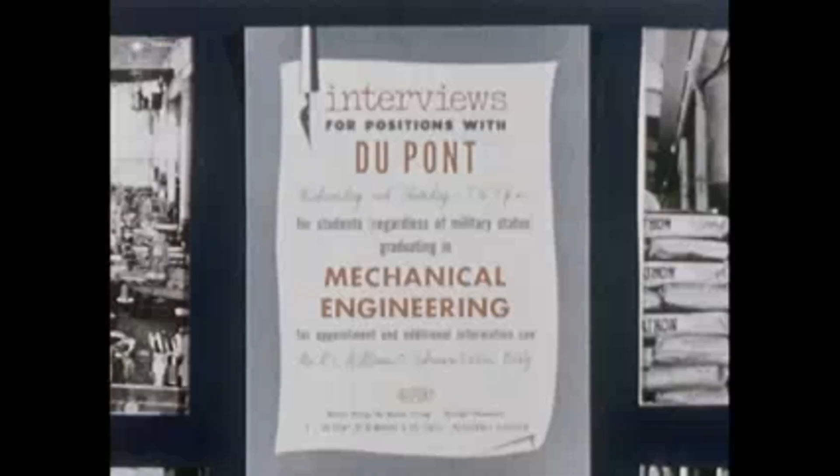This motion picture has been made to help you men who have chosen mechanical engineering as your profession. Perhaps you've considered the idea of working for a chemical company. Perhaps, like some mechanical engineers, you have wondered what a chemical company wants with men of your training. Perhaps you wondered whether you'd be working for chemical engineers, or maybe you can't see how a mechanical engineer would get very far in a chemical company.

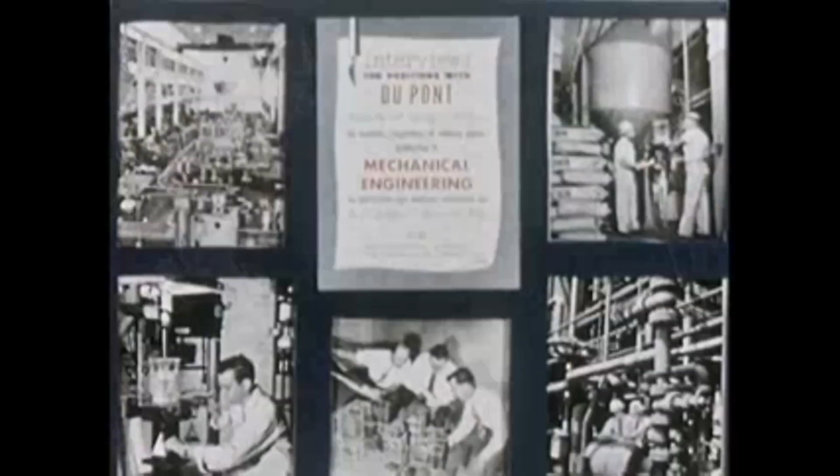That's why we want to show you something of what goes on at DuPont, where your advancement depends more on your interests and ability than on your field of training.

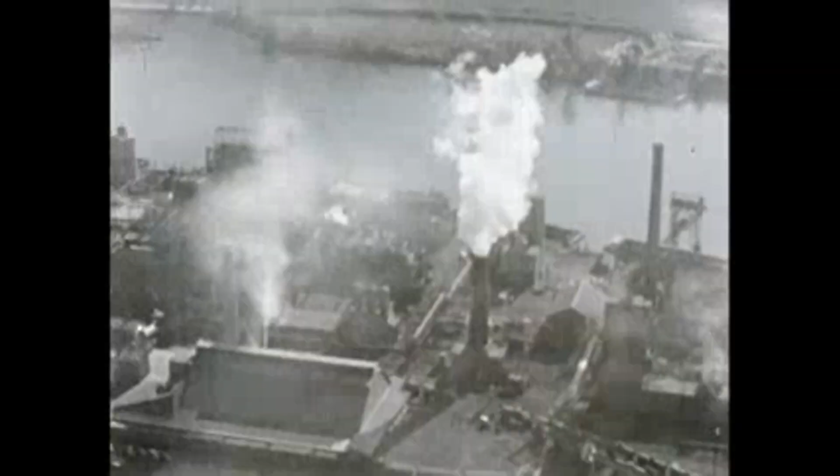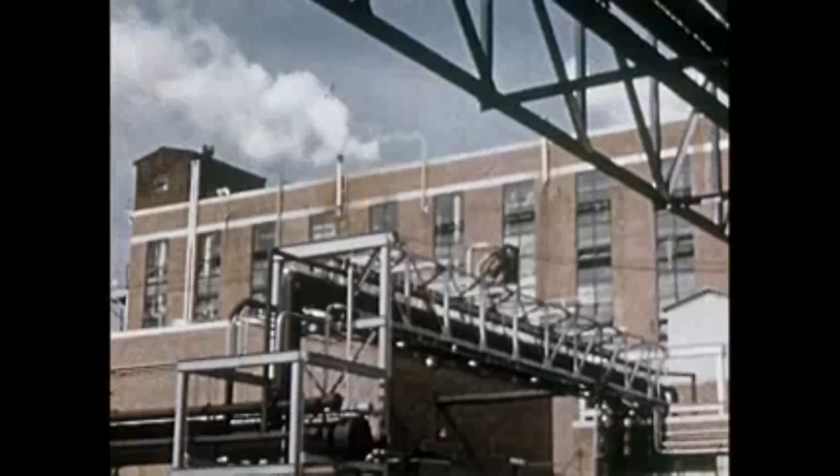Keep in mind throughout this visit to DuPont that the chemical industry is a growing one, growing by leaps and bounds. Just to give you an idea, at DuPont, in the first 5 years after World War II, over $700 million were invested in the manufacturing side of the business.

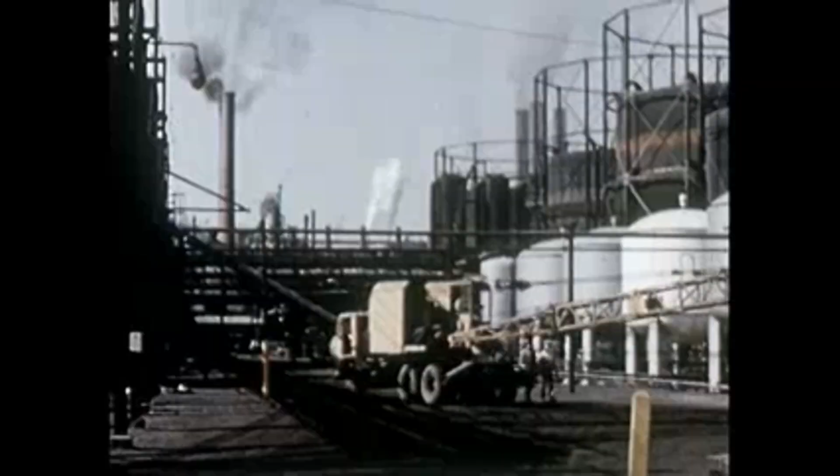There are now more than 70 plants in 25 states. No one actually can tell where the end is, but we do know that every year new and more complex products come out. New fibers, new finishes, films, dyes, plastics, agricultural products, just a few examples.

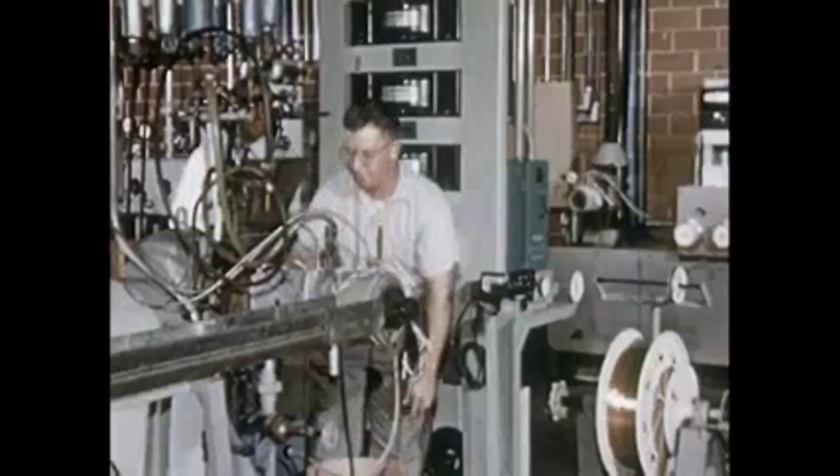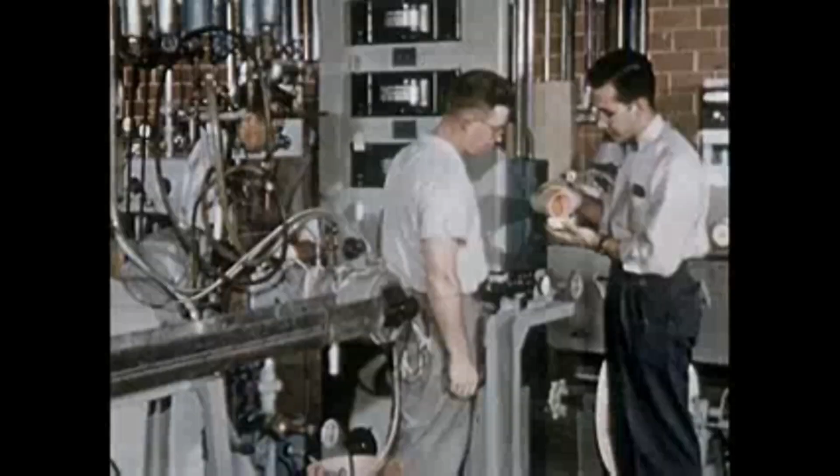Before making any one of those products commercially, a mass of mechanical problems first had to be faced, appraised, and solved. And here's something important to keep in mind: at DuPont, mechanical problems are solved by mechanical engineers.

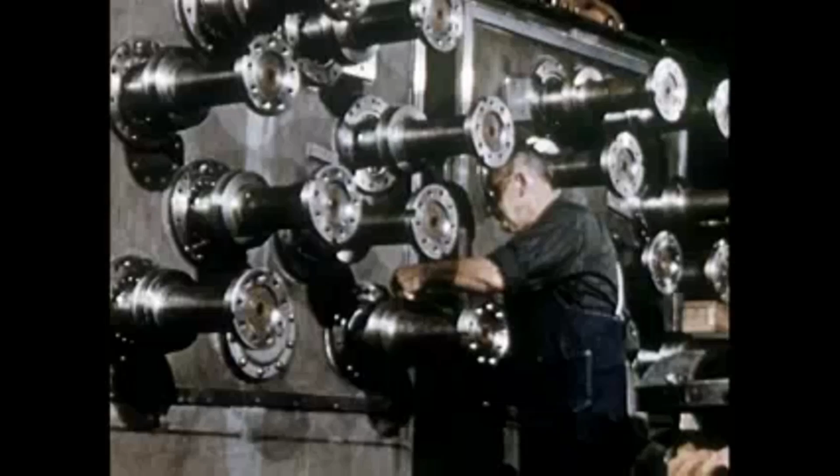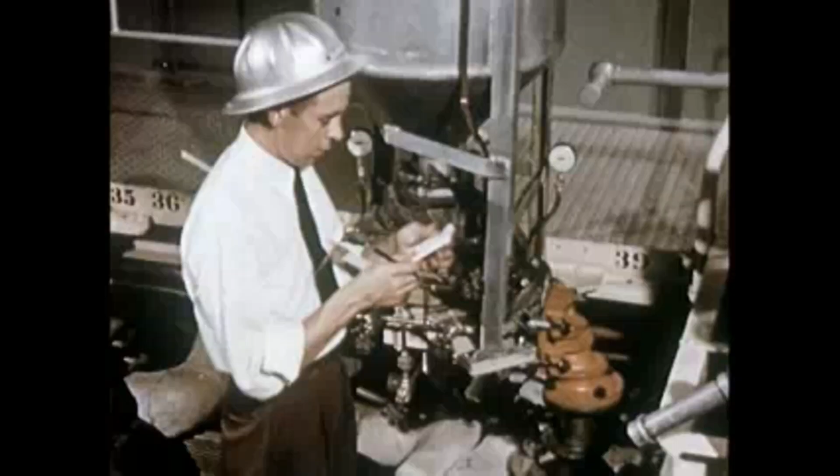The company does practically all of its own engineering work, right from the very beginnings of fundamental research. It not only develops process equipment, but actually makes a substantial part of it. DuPont men work continuously on ways to improve existing equipment. They design and build the plants, carry on the maintenance, and of course, supervise manufacturing.

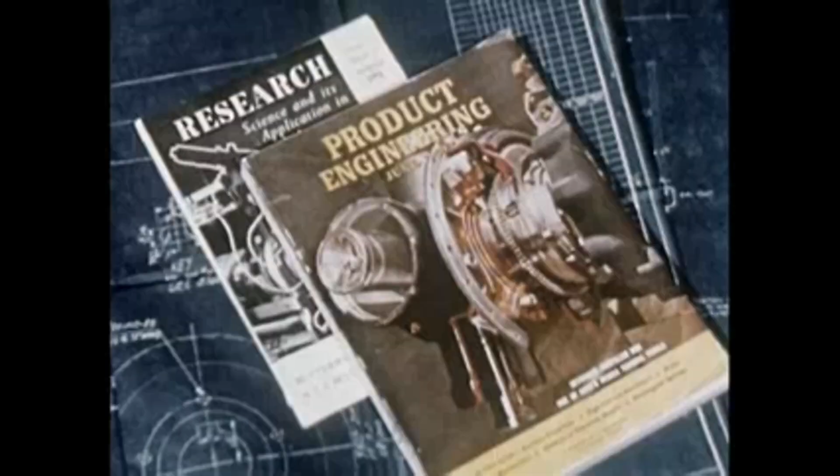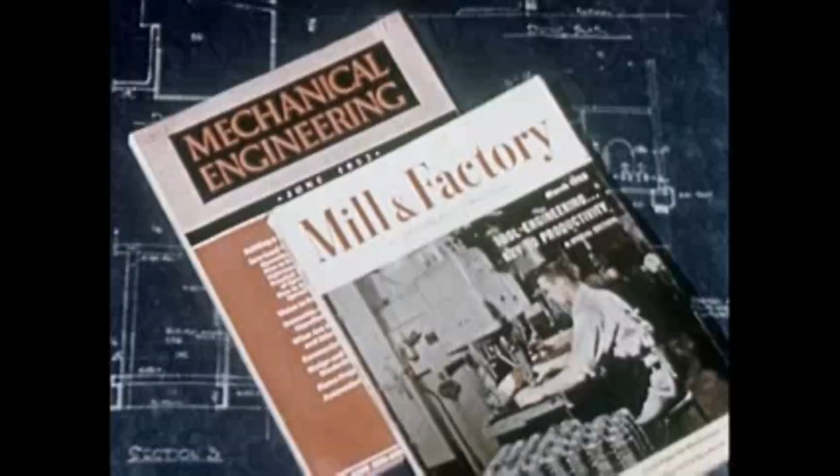Let's consider the opportunities available to you here. Is research and development your special interest? Or machine design? Maybe you're the kind of a fellow who goes more for that. How about plant engineering, including power, maintenance, design, and construction? Or production supervision? Perhaps you lean toward this kind of work with its handling of people.

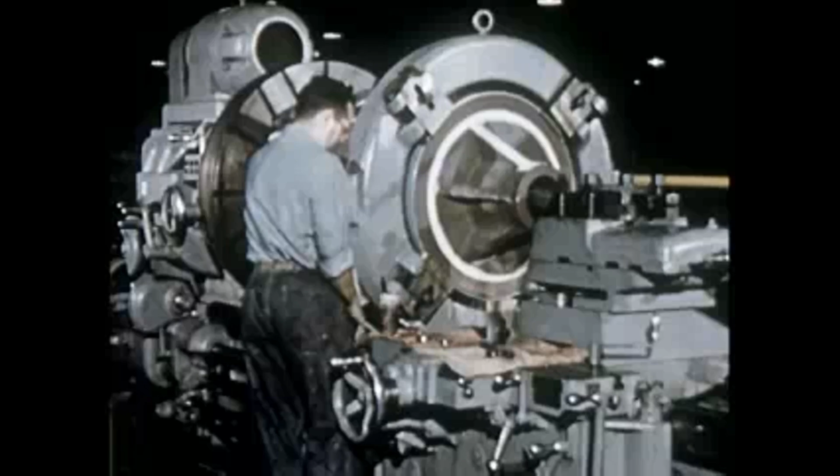Let's start with research and development. Some of the work is done here at the experimental station. A mechanical engineer in this field develops mechanisms used in making the company's products. His work may result in a massive piece of equipment like this, or in a delicate instrument like this one.

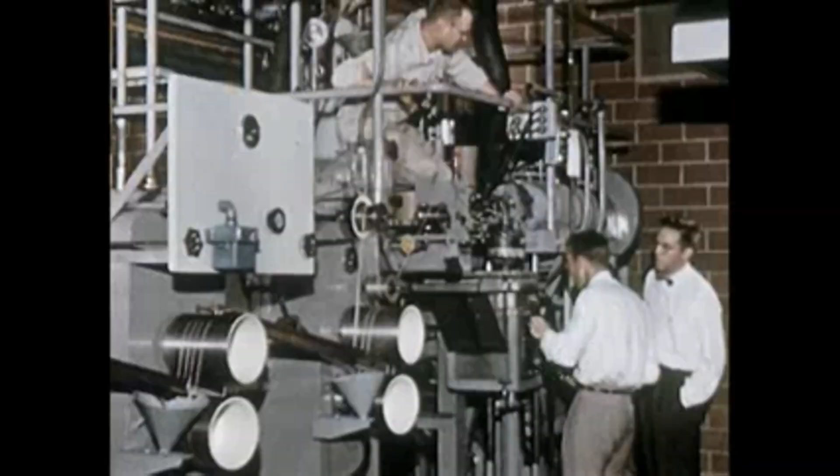There's never been a shortage of problems for research and development engineers. They run into the thousands, actually. They may lead to original equipment to meet new and specific needs, or to improvement of machines already in operation. Let's look at a few examples.

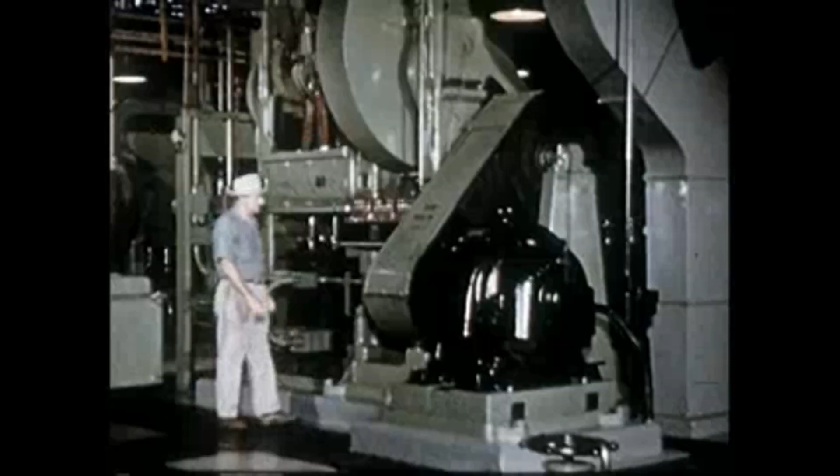These huge compressors are used in making urea from carbon dioxide and ammonia at high temperatures and pressures. Ammonia pumps like this can deliver about 100 tons a day. At these high pressures, machine work, alignment, and assembly are extremely important. Tolerances are severely narrowed as pressures climb.

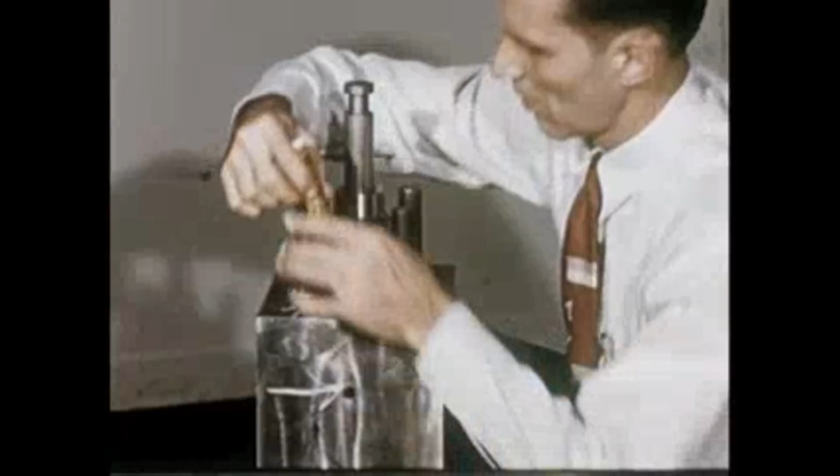One of the secrets of this type of high-pressure work is the action of the pump plunger in the packing. Specification of the right plunger material is essential. High-pressure design calls for great pains to avoid stress concentration, such as might occur in sharp transitions at corners. Pulsations at high pressures cause rapid fatigue of materials and give rise to many design problems that fall strictly in the mechanical engineer's lap.

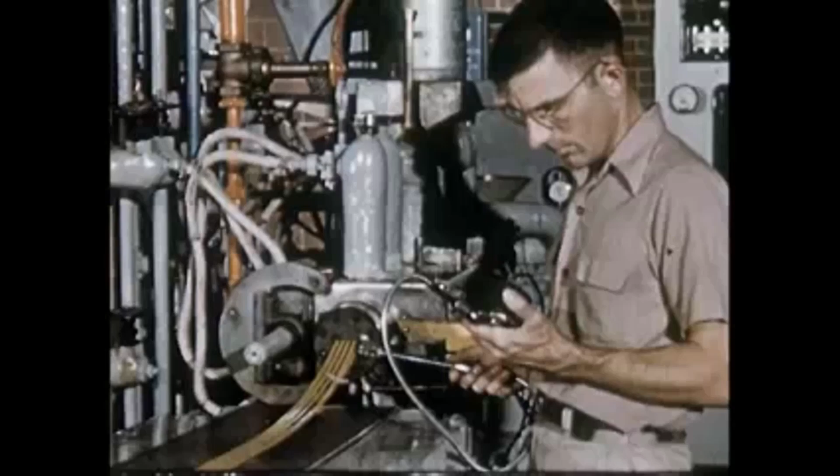Now here's a machine used in the plastics industry. It's called an extractor extruder. It melts plastic, takes the solvent from it, and extrudes it in one operation. To adapt it to DuPont plastics, or to scale it up or down, called for studies in power requirements, heat transfer, and fluid flow.

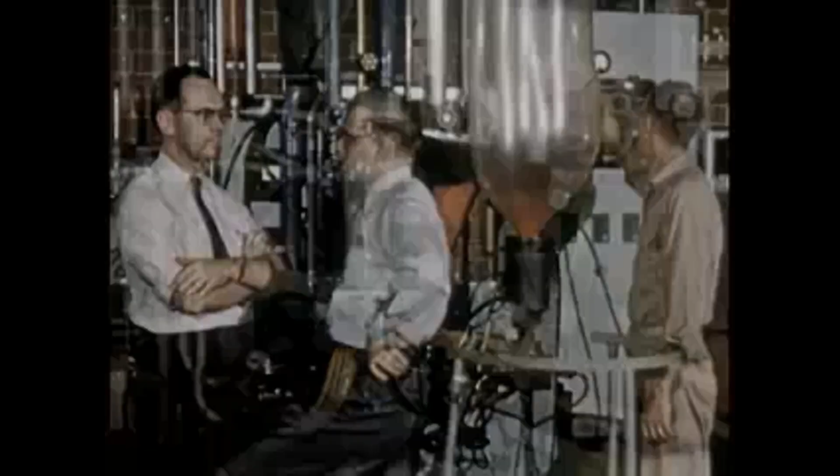In other cases, engineers often design and develop equipment for use by DuPont customers. Here are two young engineers working to improve a machine that simultaneously forms and expands a tube of plastic material. Or a fellow may get into a project that requires work at super pressures.

Here's a field that's really challenging, and young too. Behind a steel and concrete barricade, equipment can be tested at pressures far beyond those used in manufacturing today.

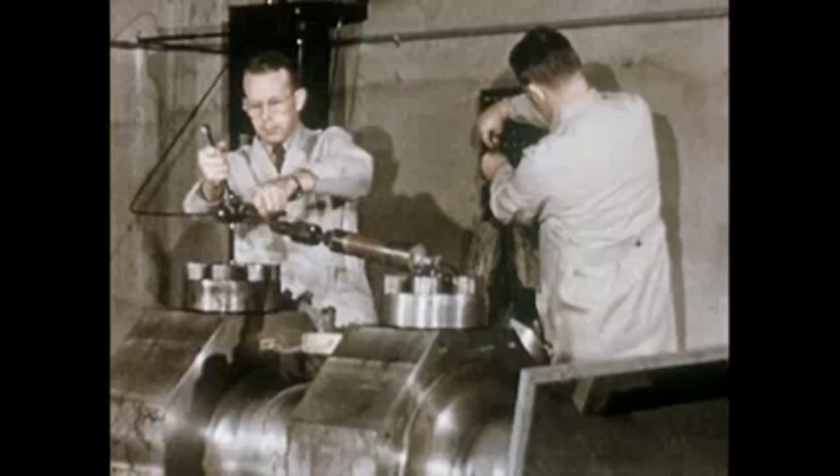After strain gauges have been attached to the test piece and the pressure lines connected, a mirror is placed so that an engineer can observe the results of the test through a periscope on the other side of the barricade.

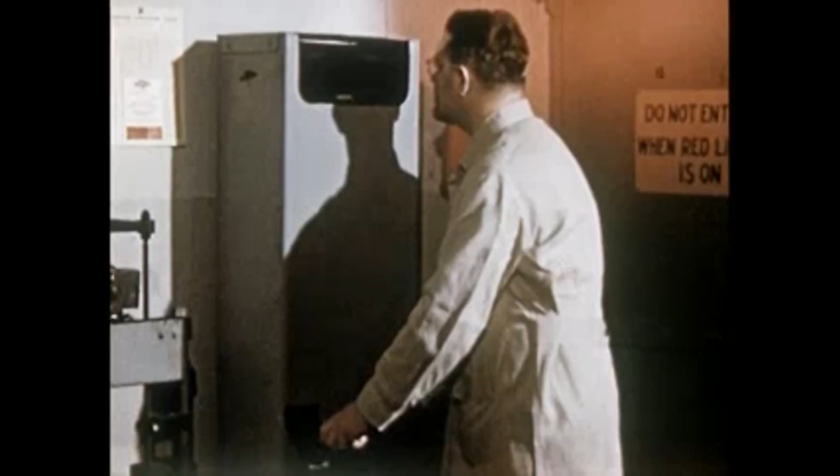There will come a time when pressures far beyond those of today will be used - 20, 30, 40,000 pounds per square inch. These men are getting ready for the time when pressures even higher than this may become part of industrial practice.

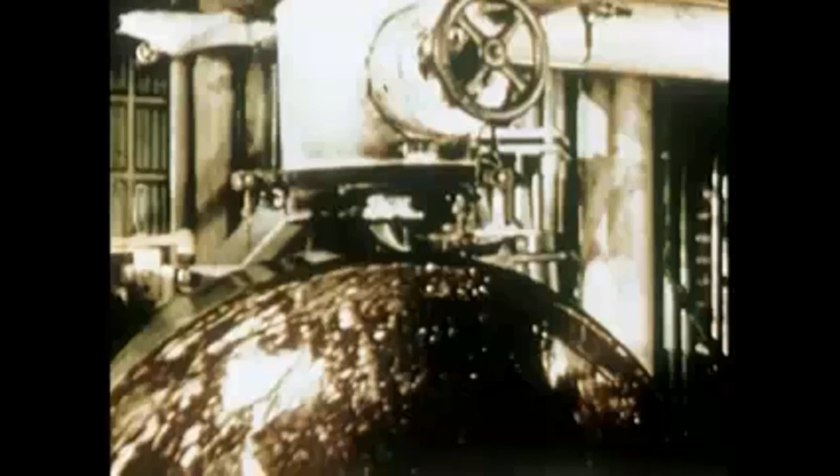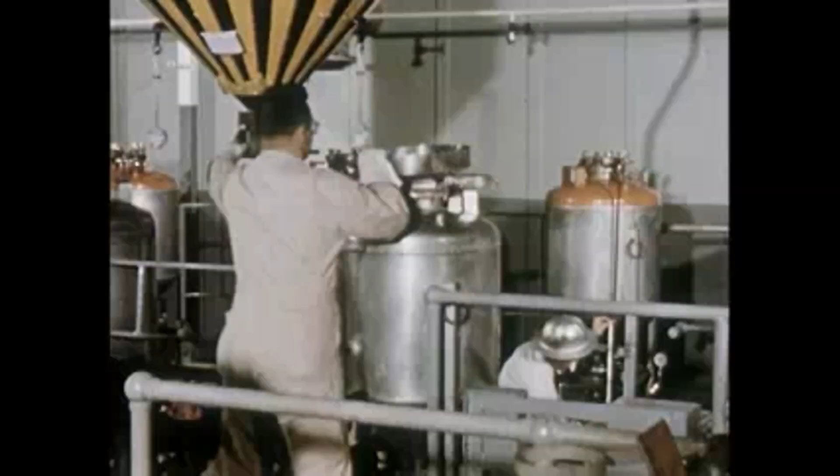When a process or product worked up by chemists moves out of the lab, teams of mechanical and chemical engineers take over. For example, here you see molten nylon being solidified on a semi-works casting wheel at an early stage in the development. Many mechanical problems had to be solved before nylon was produced successfully, and naturally, mechanical engineers had a big part in solving them.

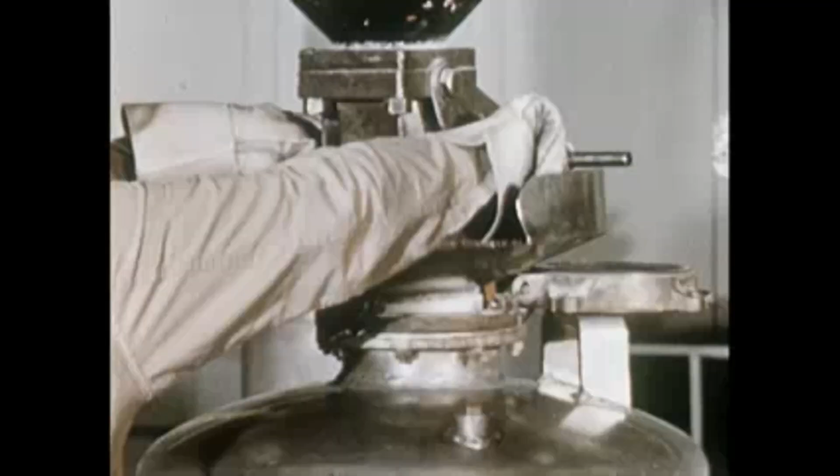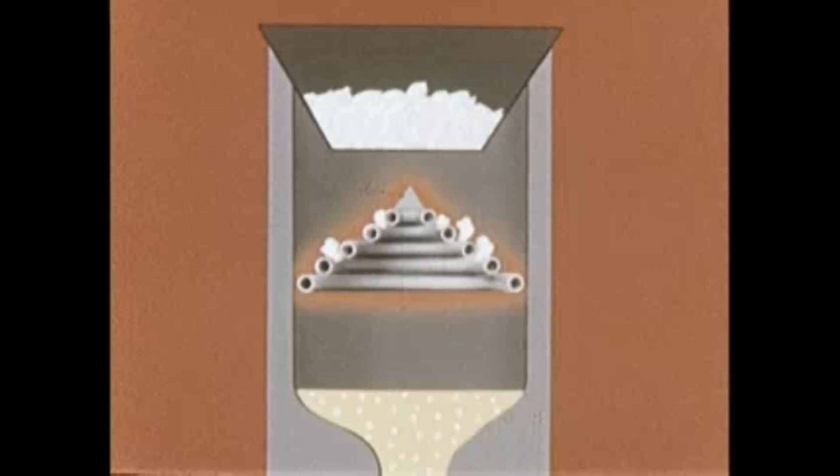Just how would you go about melting nylon chips at several hundred degrees Fahrenheit with as little decomposition as possible? Well, mechanical engineers designed and tried quite a few types of melting grids. Some of them didn't work as well as others, but they finally came up with a grid that did the job.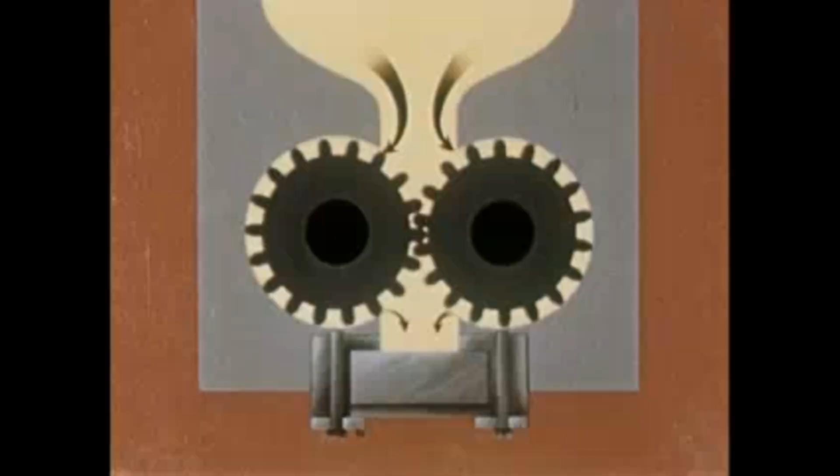Mechanical engineers designed a precision pump that works at pressures better than 1,000 pounds per square inch, but not before they licked the problems of gasketing, sealing, and materials.

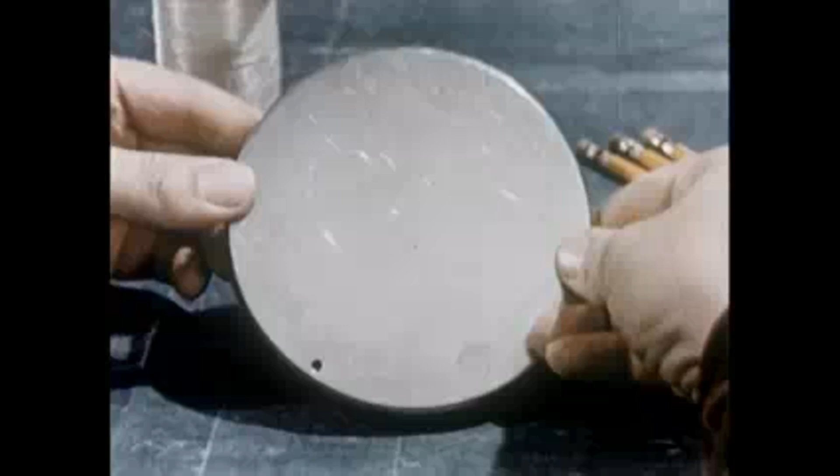The hot melted nylon solidifies into filaments as it is pumped through holes in the spinneret that are almost too tiny to see. Naturally, that spinneret isn't a standard item either. It had to be designed.

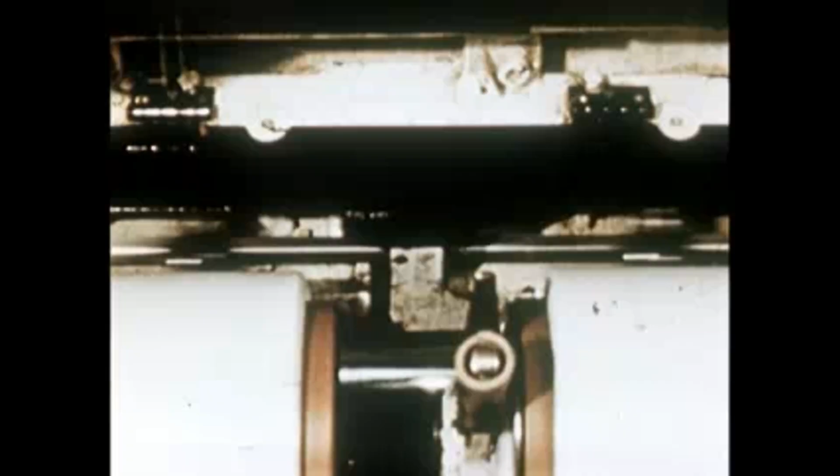Nylon fibers are sometimes wound on these spools at a rate of 1,000 yards a minute. How would you go about winding yarn at that speed without any deviation in yarn tension? Sound like an interesting problem? The fellows who developed this traversing mechanism certainly found it so.

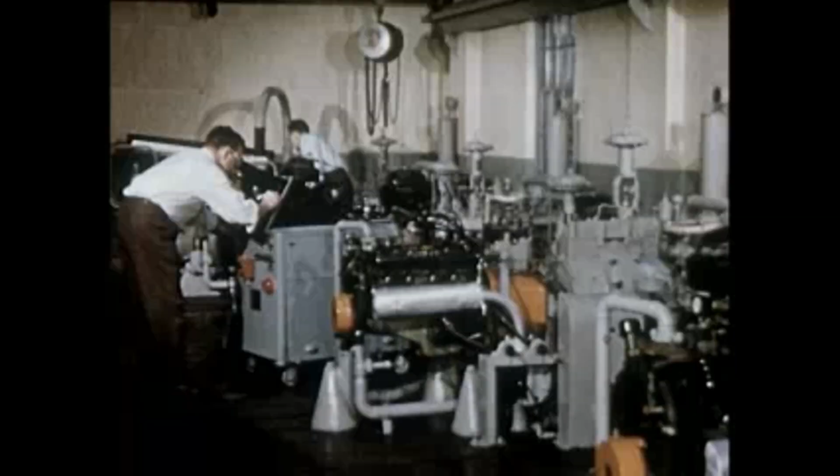Let's move on to this petroleum laboratory to see another important part of development work, activity devoted to improving existing processes and products. Here, engineers are constantly trying to improve the chemicals DuPont sells to the petroleum industry.

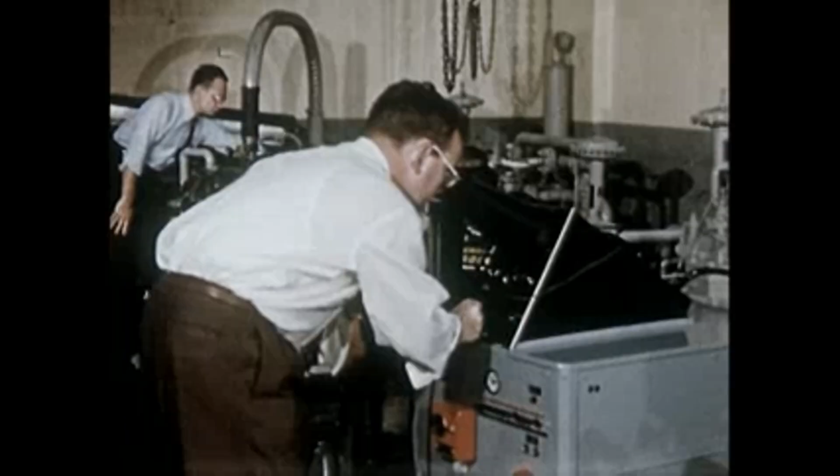Here, engineers are studying exhaust condensates that indicate the effects of tetraethyl lead. Engineers study these things in the laboratory.

They study them out on the road, too, in passenger cars, in trucks, through tests under various kinds of rigid control situations. The instruments in this test car indicate and graphically record information on such factors as horsepower, fuel consumption, speed, spark setting.

That's the way mechanical engineers, working with chemists, arrive at conclusions which result in better and better engine performances. We have seen that research and development includes developing new process equipment and improving existing processes.

It also includes design. The engineering department handles design work for most major projects. In some cases, it is machine design. In others, process equipment design. But always, it is the work of teams of engineers - mechanical, chemical, electrical, civil, and so on.

Normally, these are men who make their careers in engineering. They work with engineers from the manufacturing departments to design plant equipment and machines.

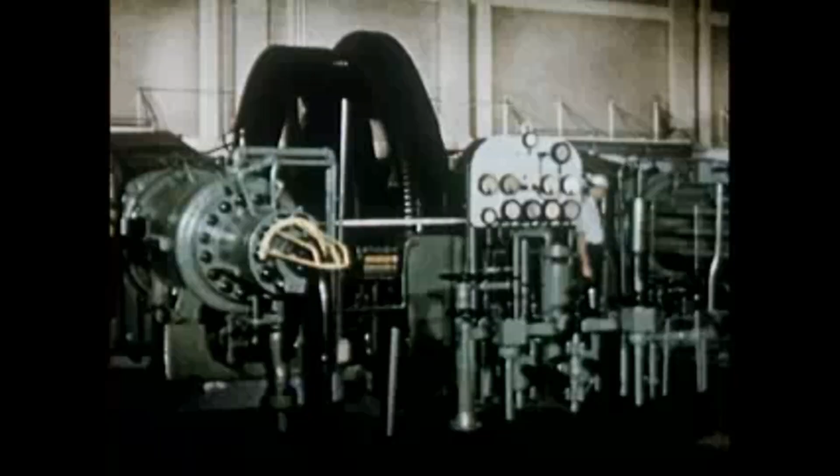For an example of major design, how about this huge hypercompressor? It builds gas pressures from 450 pounds to 12,000 pounds in 3 stages. When these compressors were built, you just couldn't buy equipment like it, so DuPont engineers pitched in and designed their own.

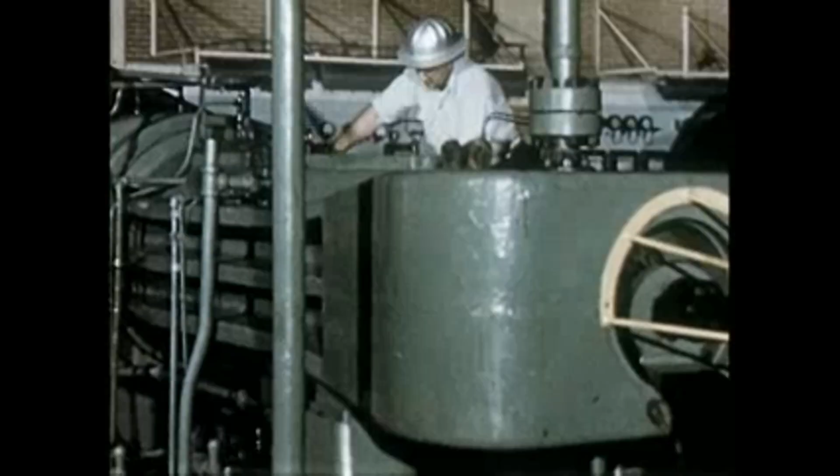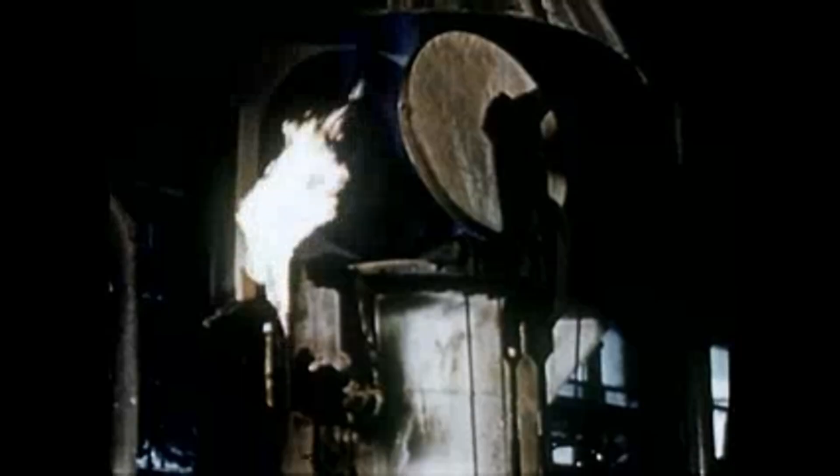Or maybe you'd like to roll up your shirt sleeves on one like this. Adapt standard equipment, such as this flue gas generator and its control mechanism, to DuPont's ever-changing needs. Over the years, more than one mechanical engineer has thought hard on this one. There she goes.

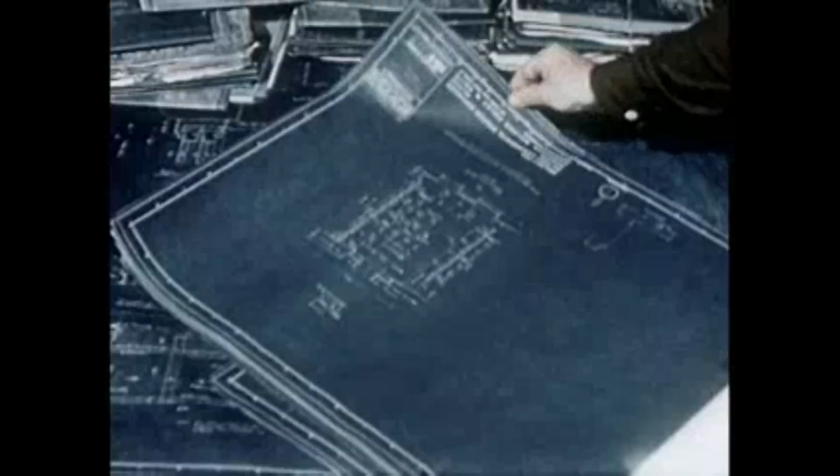These are just a few of the problems mechanical engineers work with at DuPont. They are typical of the work in research and development. Multiply them by 100 - no, better make that 1,000 - and you begin to get an idea of how important mechanical engineering is in this chemical company.

Another important phase of mechanical engineering is plant design, layout, and construction. Most companies use outside architects and contractors for this work, but DuPont does all its own.

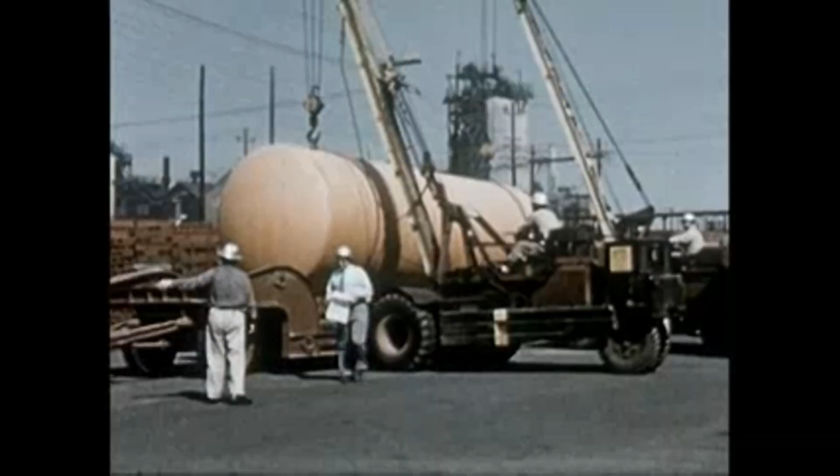Often the engineers who supervise the construction of the plants also stay on to help get them going. Of course, the design of services to go along with the buildings and machinery is included in their activities.

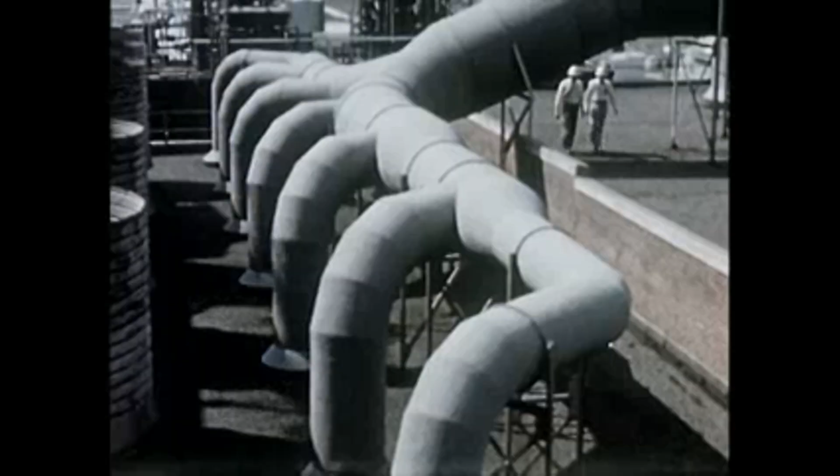For instance, this nylon manufacturing plant. These ducts are part of an air conditioning system DuPont mechanical engineers help design. During the manufacturing process, air is required at 5 separate temperatures and humidities. That's right, 5. Does that sort of problem interest you?

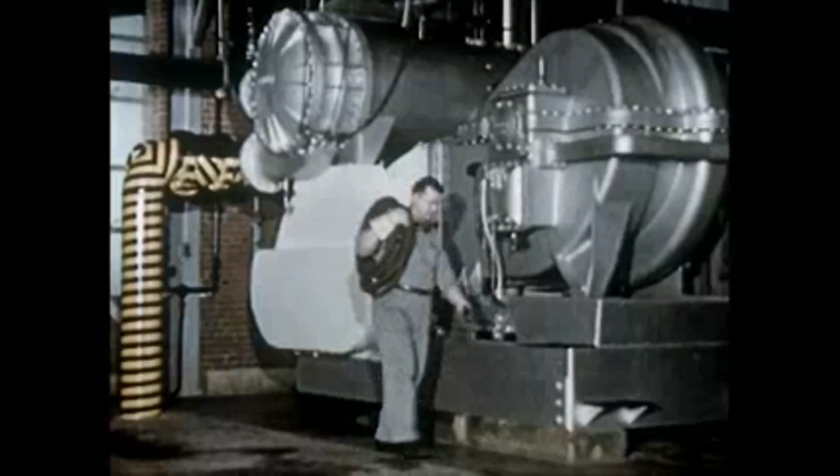As you can imagine from the size of this compressor, air conditioning is a pretty important item in many of DuPont's 70-odd plants. Or say you were tackling this problem: scrubbing carbon dioxide out of a gas mixture.

These towering scrubbers work at about 400 pounds. The pressure at the scrubbers forces the solution up the side of a mountain. Here in this tower, the pressure is released and the carbon dioxide passes off to the air. The natural fall of the water gives 200 pounds of head that doesn't have to be supplied when the water is recycled. That's both equipment and plant design in a big way.

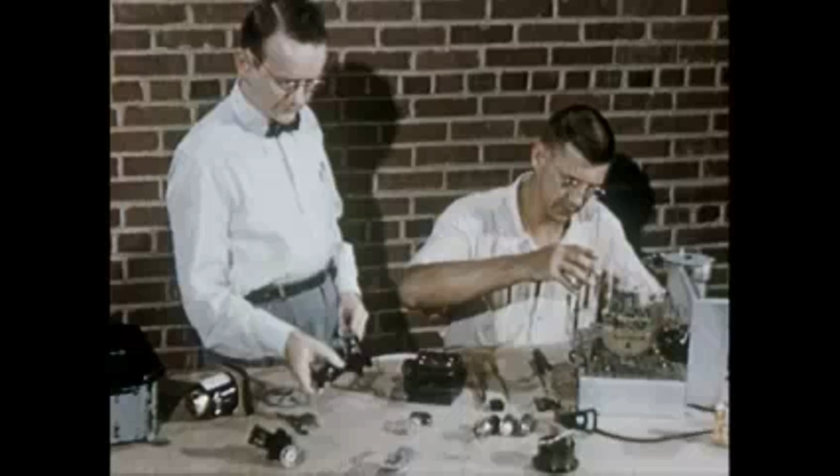Speaking of design, how about control instruments? Does that sort of work interest you? They are very important in plant design, and the advances in this field have been tremendous. In fact, control instruments today are practically a must for nearly every phase of manufacturing operation because they've come to mean so much in terms of safety and economy.

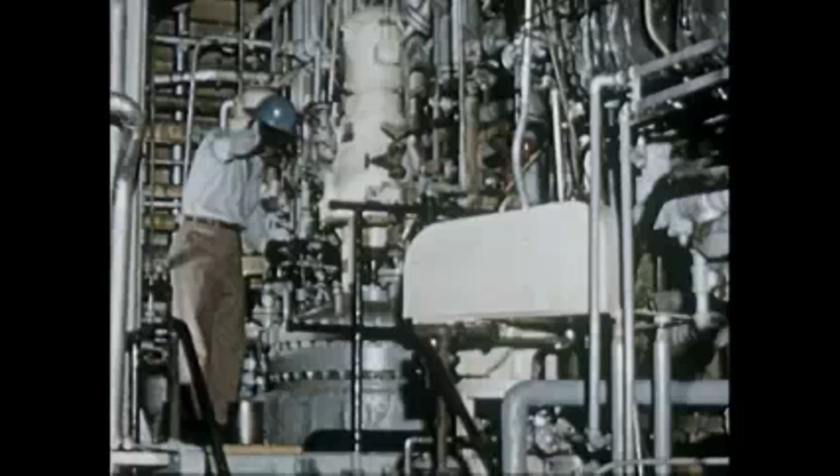Take a look at this maze of pipes, for example. To get maximum production yields, reacting chemicals must be brought together under conditions as nearly ideal as possible. All steps in the process must be smoothly coordinated.

Actually, some processes of today couldn't operate with instruments of 10 years ago. It's a fast-moving, intensely interesting field. If this kind of work appeals to you, whether you tackle it from the plant design end or from the development end, instrumentation offers tremendous opportunities.

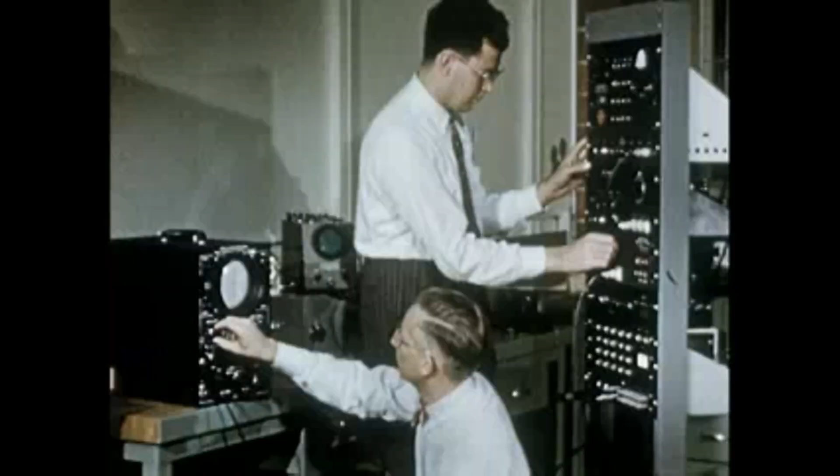Still another field for mechanical engineers at DuPont is plant engineering. This is a fairly broad field, including maintenance and power. It also includes design and construction on sub-major projects that may involve process improvement or plant expansion.

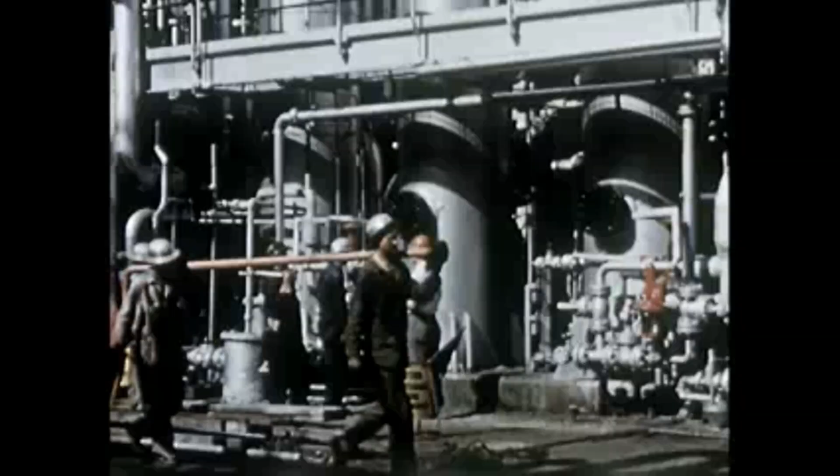Nearly all chemical manufacturing operations run on mechanical equipment: tanks, kettles, presses, pumps, valves. And this equipment gets heavy use, much of it on a 7-days-a-week basis. It's bound to wear out, and that means maintenance. Part of maintenance is keeping equipment in top mechanical shape, catching trouble before it catches you. Supervising this work calls for real ingenuity, and it involves real engineering ability.

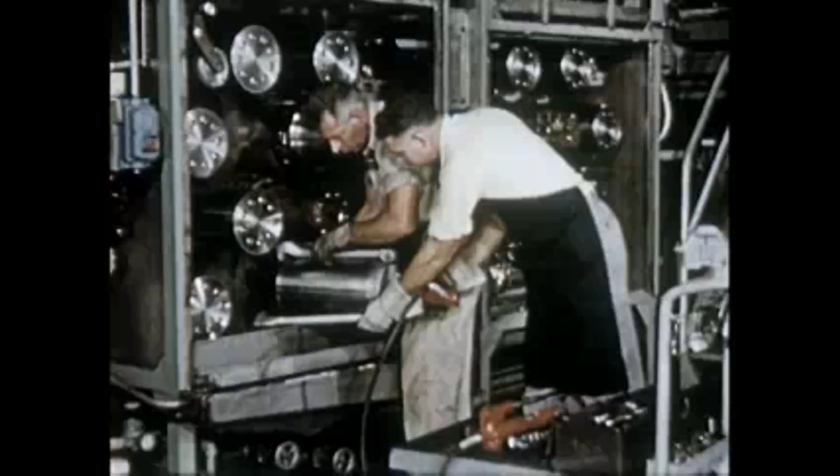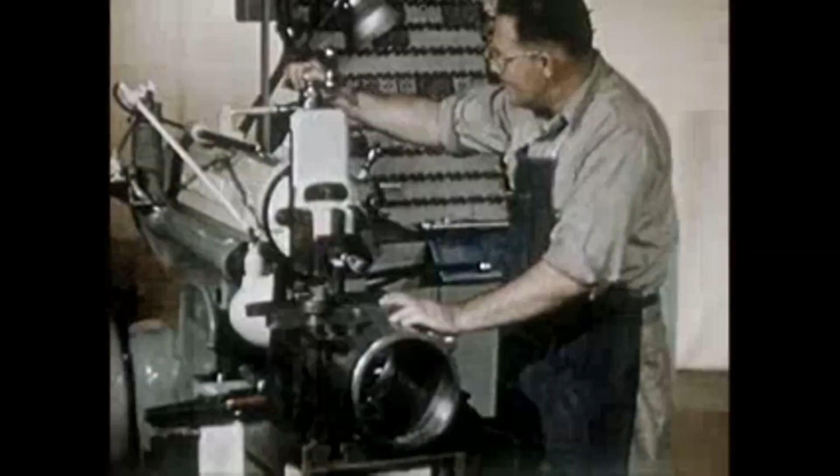Then there's the maintenance of pumps, gearboxes, automatic lubricators, and a great variety of complex equipment and process machinery. Here again is a supervisory job for alert engineers. Helping with the maintenance work are the machine shops at many DuPont plants. The needs of some of these shops are always changing. That means an almost continuous program of mechanical study ranging from layout and scheduling to working up shop standards.

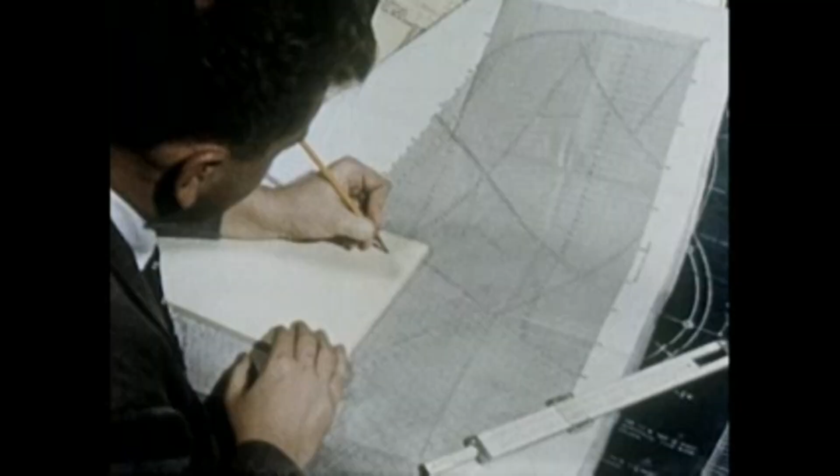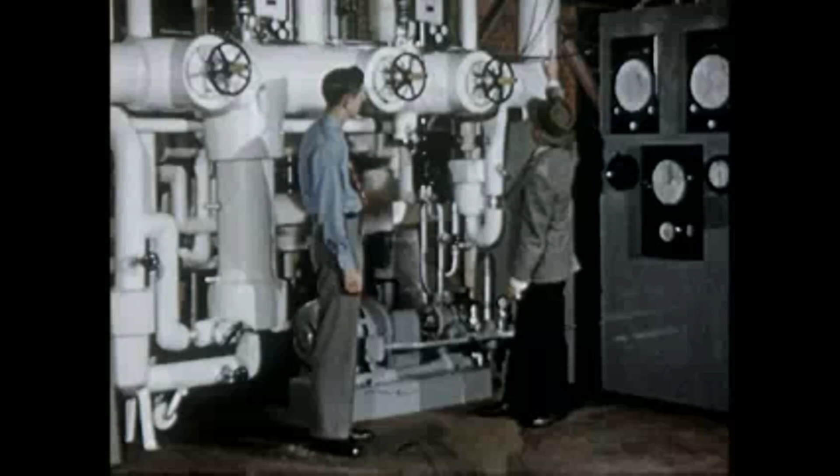Now, let's say your major interest is power. Power is as essential in a chemical plant as it is in any other kind. And the power problems that arise from some of DuPont's complex operations are about as challenging as can be found anywhere. Power engineers at DuPont must supply steam, electricity, water, air, refrigeration, and other services under a variety of conditions.

Look at this steam-reducing station. It is one of several operating at various pressure differentials. They supply steam at the right pressures and temperatures over a wide range of capacities, from 1,000 to 20,000 pounds per hour in short periods of time.

Boiler feed water pumps, compression distilling units, fuel pumps. Almost all power plant equipment needs plenty of engineering know-how to avoid interruption in these essential services.

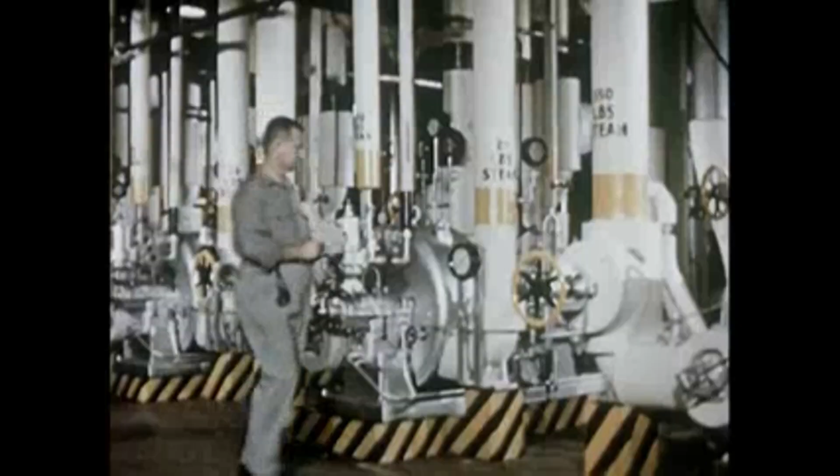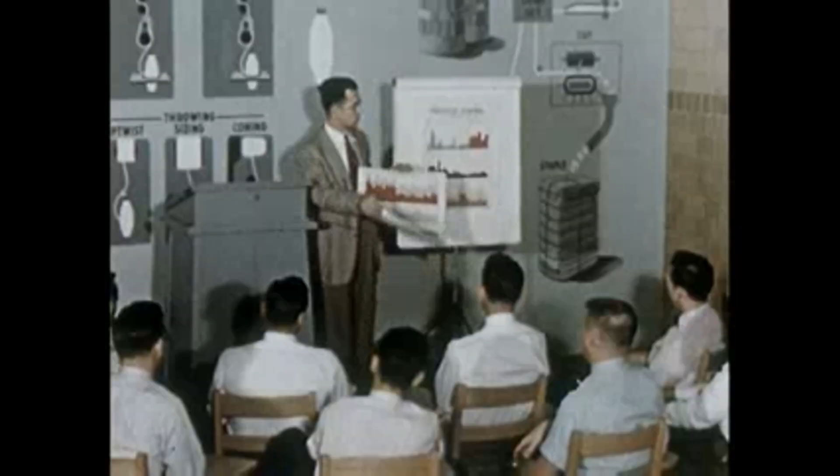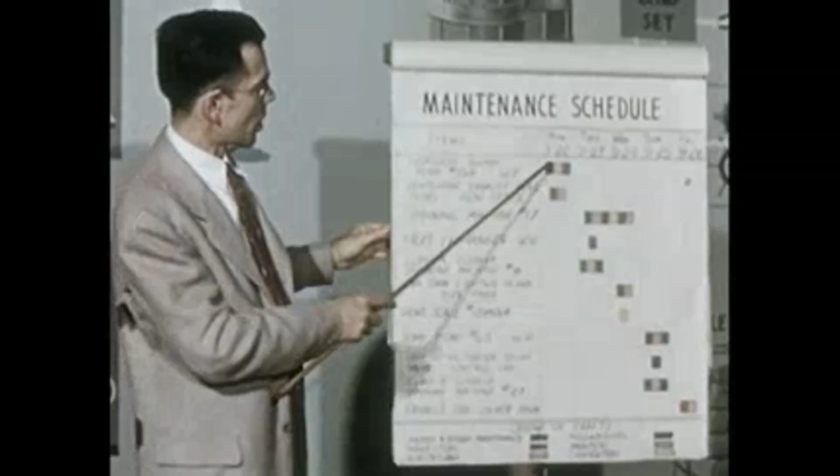Production supervision is another major activity at DuPont for engineers who like to work with people but still want to put their technical training to good use. The duties are broad and cover all phases of plant operation. Such a job might well include setting up efficient maintenance schedules for equipment, keeping production rolling, maintaining quality, reducing waste, and at the same time building employee morale.

Quality production is determined by individual workers. Each must understand the importance of his job, and it's up to the production supervisors to develop this understanding. The mechanical engineers and others who advance in this work train both wage roll and professional employees in manufacturing processes and the use of equipment, an important responsibility.

They also work with development engineers in plant technical sections and the central engineering department. Here their knowledge of the manufacturing process is used in working out designs for process improvement or new plants. In all cases, the planning and conduct of a continuing program of training in safe working practices is an important part of supervisory work. Raw material scheduling, quality standards of intermediates and finished products, handling employee suggestions, all are part of the work in production supervision.

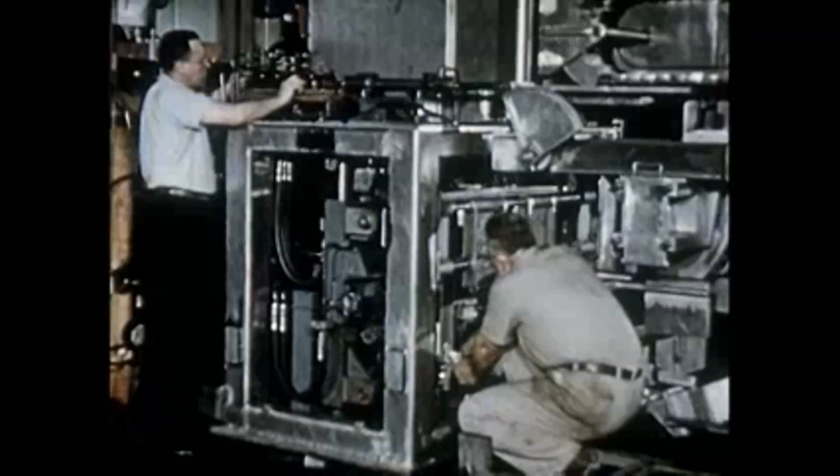The Mechanical Development Laboratory is evidence, too, of how important mechanical engineering is at DuPont. A principal activity of the laboratory is to develop and build full-scale automatic machines to be used as models for those in manufacture.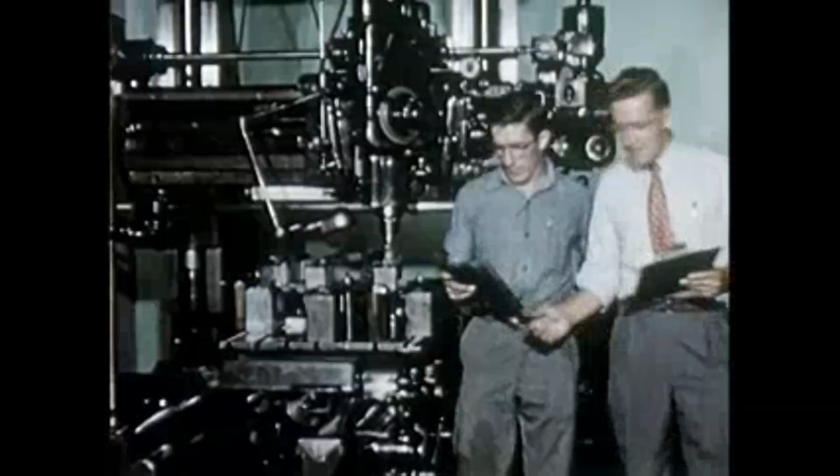The Wilmington shops are still further evidence. They make special equipment and machines for company use. They are among the most completely equipped in the country, and it's all top-notch equipment, ranging from small bench lathes to large diameter boring machines.

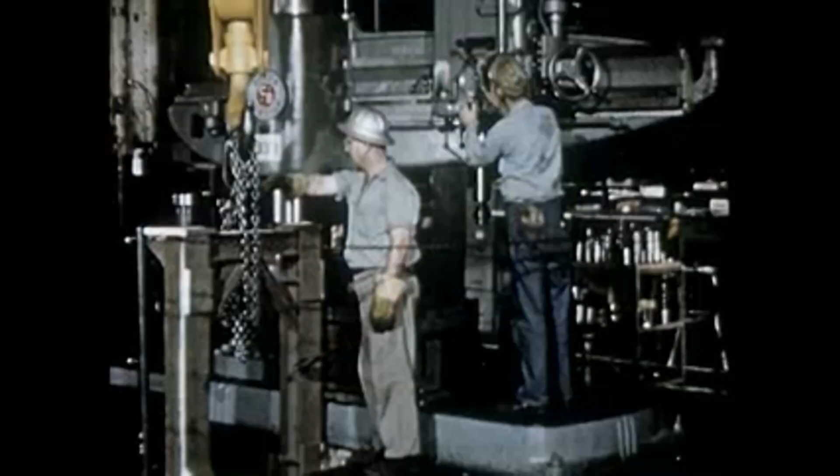Notice that this radial drill press has built-in pits for deep drilling. And how often do you see a 50-inch magnetic chuck? It makes possible the grinding of filter press plates and frames.

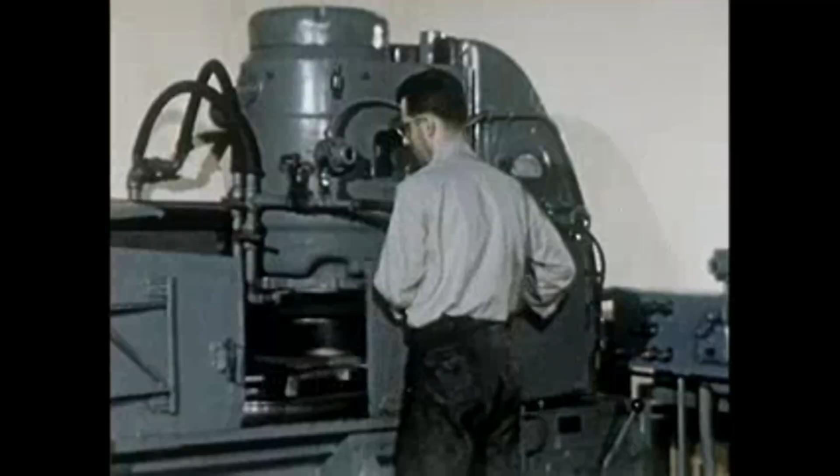Here's something else, a 12-foot vernier gauge that, in spite of its size, is as accurate as the best of the smaller ones. This optical comparator shows up errors on machining as small as 2/10,000ths of an inch. And here's a micro drill that puts holes in hard metal so small that you have to use a microscope to get a good look at the hole it drills.

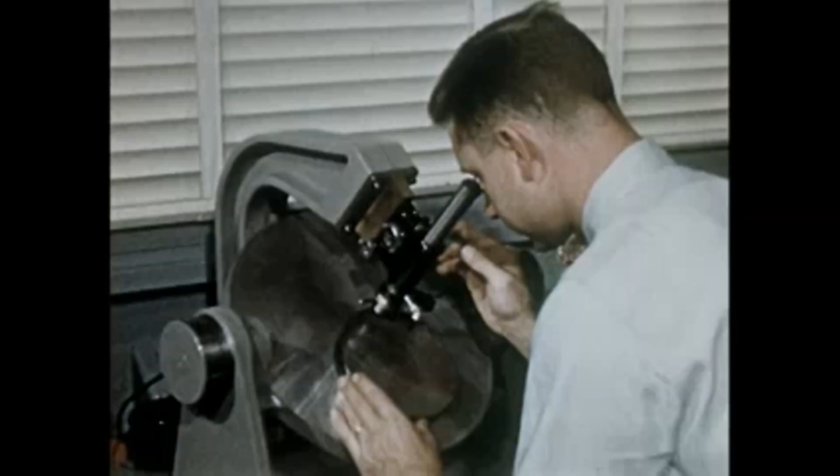Yes, a mechanical engineer has quite a bit of elbow room around here with all this equipment to serve him.

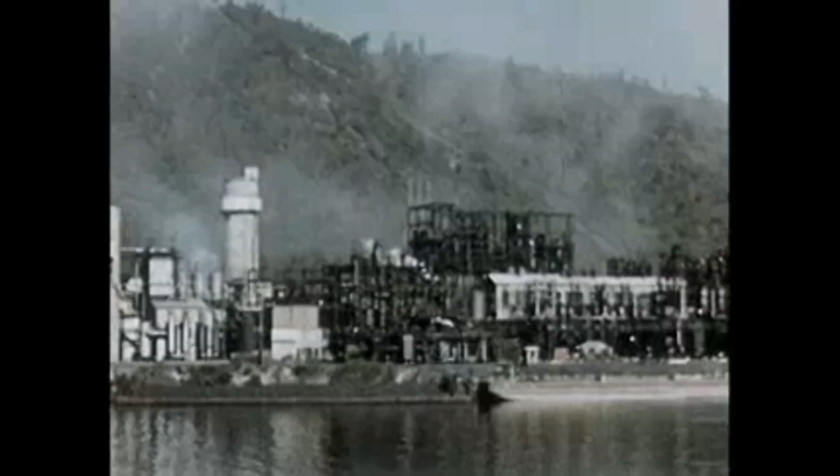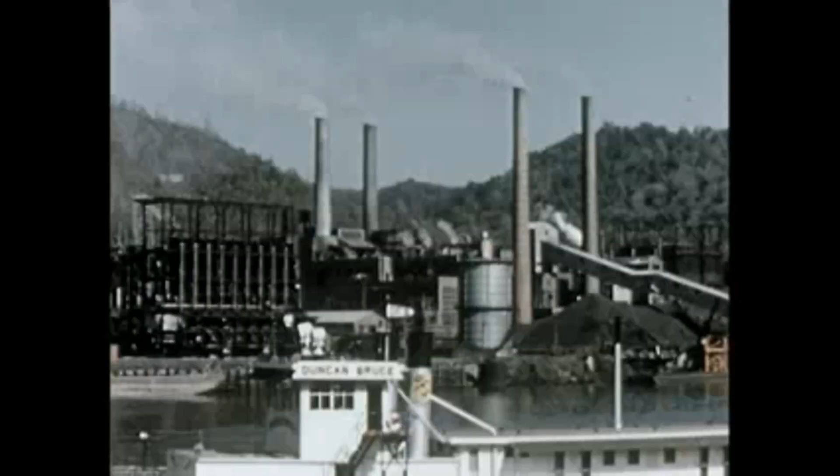Now that you have an idea of what does go on in a chemical company, you can see that instead of no opportunities, a mechanical engineer has many opportunities to use his abilities and training, and in many fields. Because DuPont's 10 manufacturing departments operate to a large extent as 10 separate companies, the way a man heads towards his goal varies from department to department.

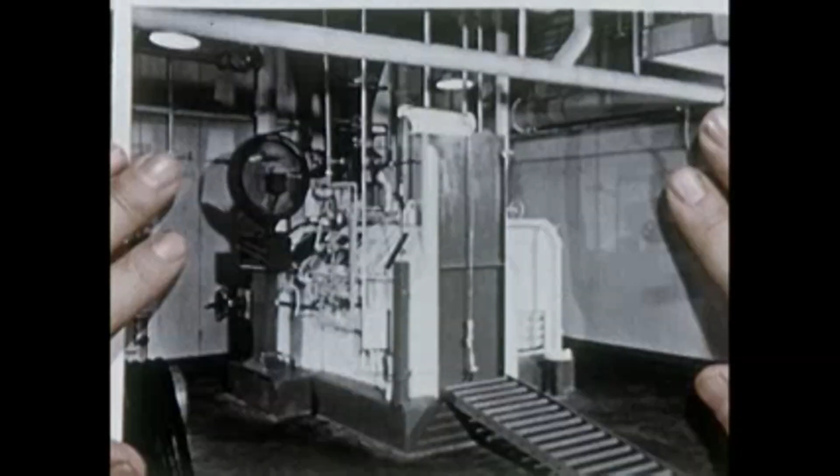You might start off working with a man who has had many years of practical experience. You collect material, assemble data, make calculations. In other words, learn the ropes. Gradually, you'd take on more and more responsibility until you've had enough experience to size up a problem, develop a method of attack, lay out a schedule, determine costs, and see the project through. In short, be on your own.

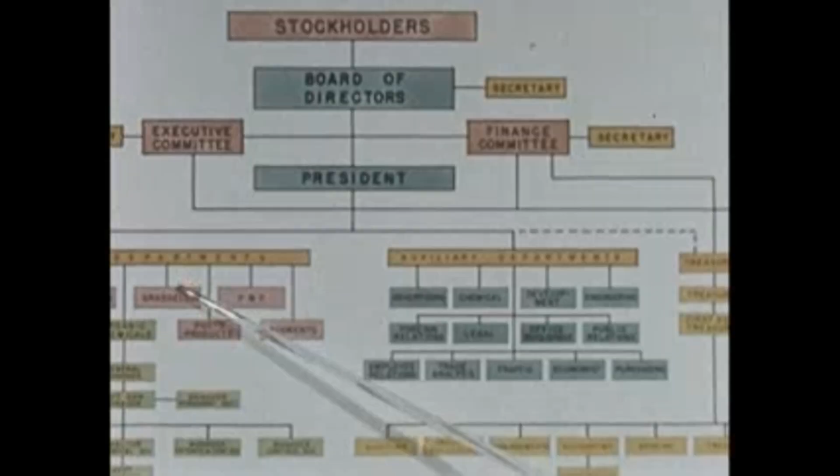In the manufacturing end, DuPont has several types of training programs. You may begin on an informal basis in a plant, as with some departments, or you may attend a formal training program that includes conferences on leadership, procedures, employee relations, company policy, and safety. In either case, you have every opportunity to get a broad picture of the company, as well as to learn your job. But regardless of which way you go, you'll find vast sources of information for your use.

Fine libraries with technical, trade, and patent literature. Over 100 engineering consultants within the company, each an expert with years of experience. Metallurgy, stress analysis, power, lubrication, instrumentation, yes, even meteorology.

At DuPont, there is a never-ending need for better machines, better ways to do new things to meet the challenges of the future. Research and development, design and construction, production supervision, and all phases of plant engineering unite to meet these challenges. Mechanical engineers work with each other and with specialists of many other fields towards a single objective: better living for mankind, through new ideas, new methods, new products, and improvements on existing ones.

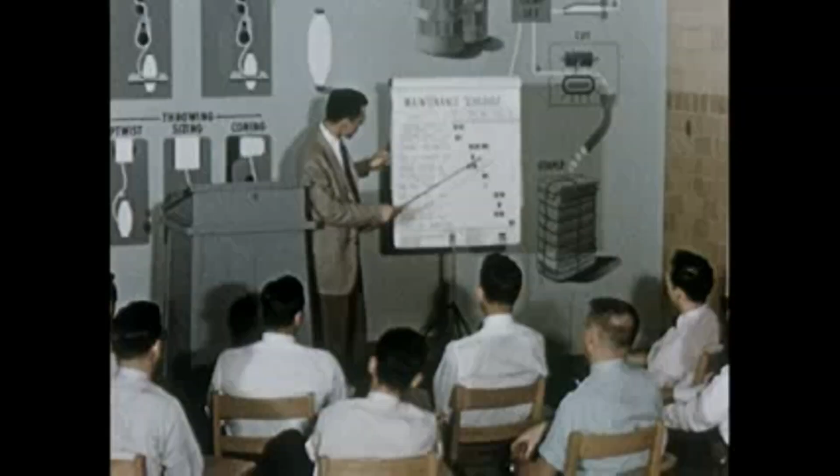There are many opportunities to contribute to this objective, and while doing so, there is the opportunity to express your creative talent and ability, to accept real responsibility, whatever your field of training. Yes, in such an environment, you can look to a bright future with confidence and optimism.